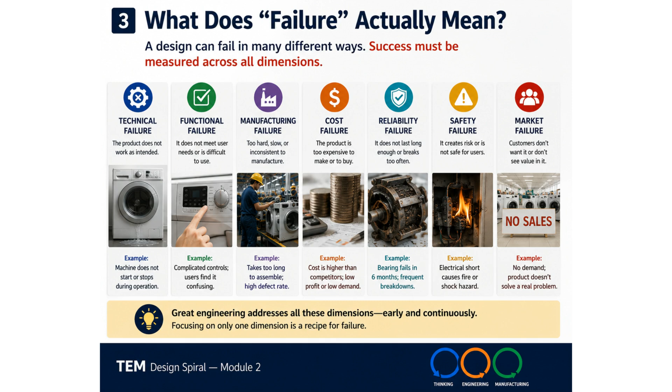A product can also fail because it is unreliable, breaking down frequently during normal operation. Even if everything else is acceptable, a design fails if it creates safety risks for the user. And finally, a technically excellent product can still fail in the market if it doesn't solve a real customer problem, or if people simply don't want to buy it. Successful engineering means balancing all of these dimensions, not just making the product work.

One of the biggest reasons engineering designs fail is surprisingly simple. We solve the wrong problem. Imagine we want to design a washing machine for a rural community. We may assume that customers want more automatic functions, more washing programs, and advanced electronic controls. So we design an excellent, high-technology washing machine. But what if the real needs are completely different?

Perhaps customers need a machine that is affordable, uses less water and electricity, is easy to repair, and can operate reliably under difficult environmental conditions. Our engineering may be excellent, the product may work perfectly, but we have solved the wrong problem. This type of failure usually begins before engineering even starts, when we make assumptions instead of deeply understanding the user and the real operating environment.

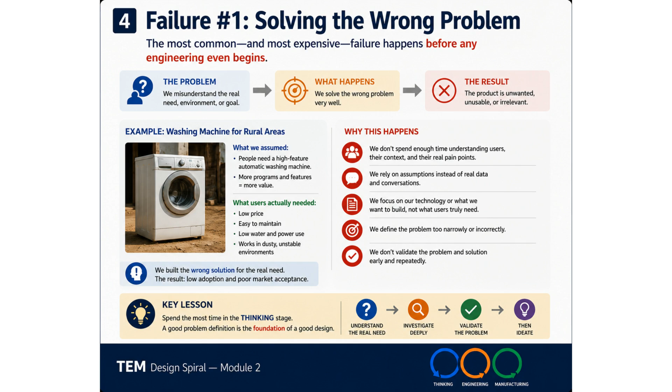That is why the thinking stage of the TEM design spiral is so important. Before asking, how do we design the solution, we must first ask, are we solving the right problem? Once we understand the problem, there is another common mistake. We fall in love with the very first solution that comes to mind.

As engineers, we naturally enjoy solving problems. So when a promising idea appears, we often become excited and immediately start designing. But the first idea is rarely the best idea. Imagine designing a new washing machine. Your first concept may be a fully automatic, feature-rich product. Without exploring other possibilities, you begin detailed design.

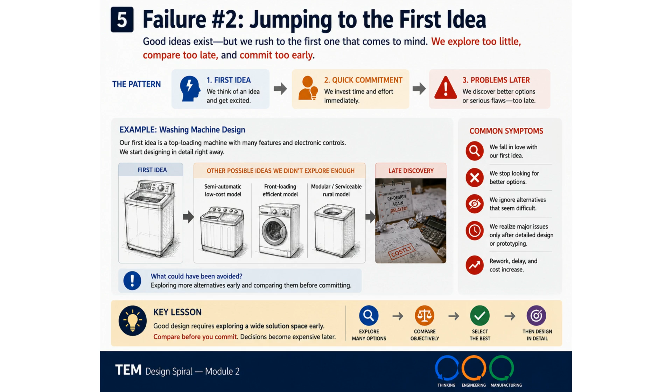Later, you discover that a simpler, lower-cost design would have been easier to manufacture, more reliable, and better suited to the customer's needs. Now the project requires redesign, causing delays, extra cost, and wasted effort. Great designers don't stop at the first idea. They explore many alternatives, compare them objectively, and only then commit to the best solution. In the TEM design spiral, exploring multiple concepts during the thinking stage dramatically reduces expensive changes later in the project.

Another common mistake is starting detailed engineering too early. Once we have a promising concept, we may immediately begin detailed CAD models, engineering calculations, component selection, and technical drawings. But there is an important question. Have we actually proven that the basic concept will work?

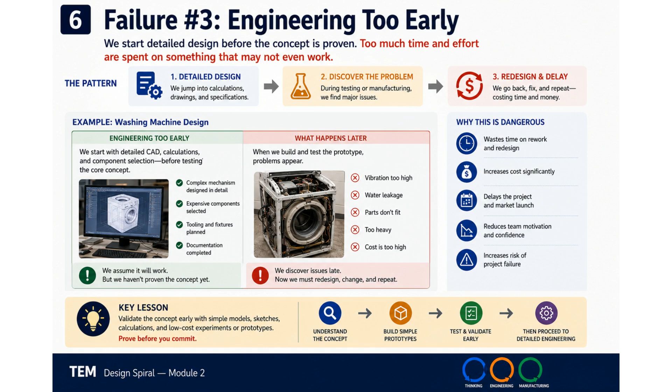Imagine spending weeks designing a washing machine mechanism in detail, only to discover during prototype testing that it creates excessive vibration, requires too much power, or is simply too expensive to manufacture. Now, much of that detailed engineering work must be repeated. A better approach is to validate the important assumptions early. Use simple calculations, simulations, basic models, and low-cost prototypes to answer the critical questions first. Then, once we have confidence in the concept, we can invest in detailed engineering. The lesson is simple. Prove the concept before you commit to the details.

Many engineering designs look excellent on the computer screen. The CAD model is beautiful, the calculations are correct, and every component fits perfectly in the virtual world. But then, the design reaches the factory. The manufacturing engineers immediately identify problems.

Some parts require extremely tight tolerances that are difficult to achieve consistently. Others require expensive tooling or complex assembly procedures. Some components take too long to manufacture, while others are difficult to inspect or repair. The design may still work technically, but it is now too expensive, too slow, or too difficult to produce.

A successful engineering design must be designed not only for performance, but also for manufacturing. This is why experienced companies involve manufacturing engineers from the very beginning of the design process. A good engineer doesn't ask only, will this work? They also ask, can we manufacture it efficiently, repeatedly, and at a competitive cost? That question often determines whether a product succeeds or fails.

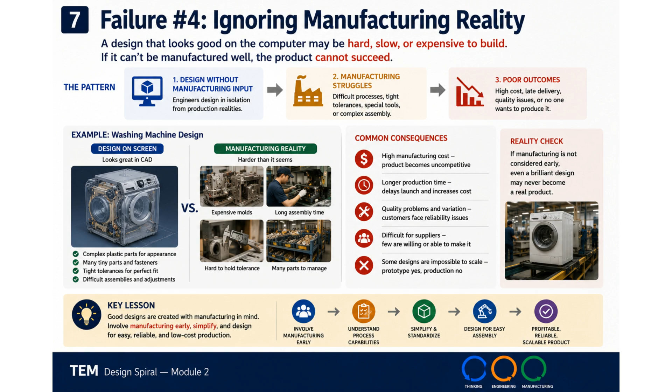All of the failures we have discussed so far lead to one common outcome. We discover important problems too late. Perhaps we skipped concept validation. Perhaps we didn't explore enough alternatives. Perhaps we ignored manufacturing or user feedback. The result is the same. Major problems are discovered only after detailed design, prototype construction, or even after production has begun. At that stage, every design change becomes much more expensive.

A small design modification that would have taken a few hours during the concept stage may now require redesigning drawings, modifying tooling, rebuilding prototypes, repeating tests, and delaying production. The later a problem is discovered, the more people, money, and time are affected. That is why successful engineering teams continuously ask one question throughout the project. What can we test today instead of discovering tomorrow?

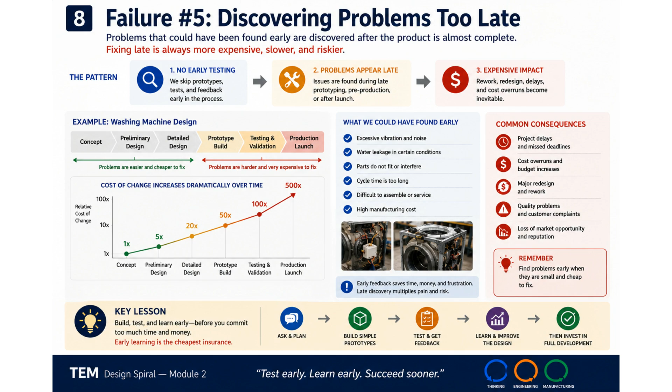The purpose of prototypes and experiments is not to prove that we are right. Their purpose is to discover, as early as possible, where we are wrong. Early learning is the cheapest form of engineering. Why is discovering a problem late so dangerous? Because the cost of changing a design increases dramatically as the project progresses.

During the concept stage, changing an idea may require nothing more than changing a sketch or updating a few calculations. During detailed engineering, the same change may require new CAD models, drawings, calculations, and component selections. After a prototype has been built, the prototype itself may need to be modified or rebuilt.

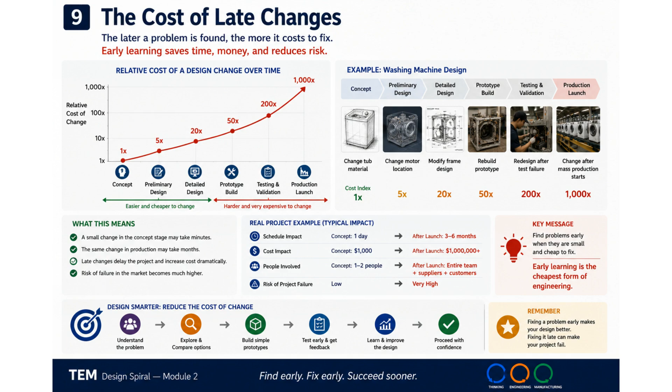And once production has started, a design change may affect tooling, suppliers, inventory, assembly procedures, testing, and even products that have already reached customers. So the exact cost multiplier will vary from project to project, but the principle is clear. The later we discover a problem, the more expensive it becomes to correct. This is why good engineering is not about avoiding all mistakes. It is about discovering mistakes when they are still small, inexpensive, and easy to correct. Find early, fix early, learn early.

So, how do good engineering teams avoid these failures? They do not rely on getting everything right the first time. Instead, they follow a disciplined process that helps them discover what they do not yet know. They begin by understanding the real problem and challenging their own assumptions. They explore multiple solutions before committing to one. They use simple models, calculations, experiments, and prototypes to test the most important assumptions early.

They involve users, manufacturing engineers, suppliers, and other stakeholders before major decisions become difficult to change. And when something fails during testing, they don't simply see it as a setback. They treat it as information. They learn, improve the design, and repeat the process. This is the mindset behind the TEM design spiral. Think early, test early, learn early, then invest in detailed engineering and manufacturing with greater confidence.

The TEM design spiral provides a structured response to the failures we have discussed. Instead of treating design as a straight line from idea to finished product, we move progressively through 3 stages: thinking, engineering, and manufacturing. In the thinking stage, we focus on conceptual design. We understand the real problem, explore different possibilities, and select promising concepts. In the engineering stage, we develop the preliminary design. We analyze, calculate, simulate, prototype, and validate the concept.

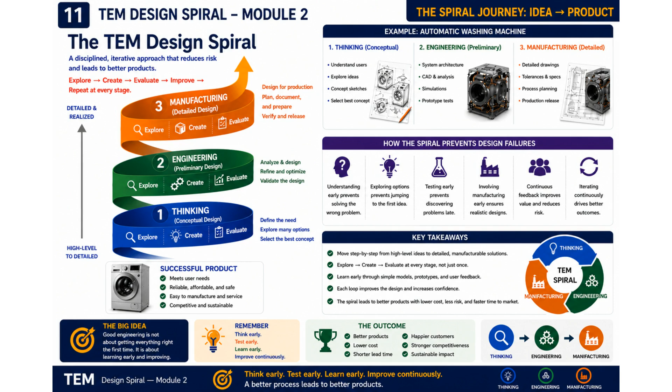In the manufacturing stage, we move toward detailed design and production. We define specifications, tolerances, processes, assembly methods, and everything required to manufacture the product reliably. But the most important idea is this: within every stage, we explore, create, and evaluate. When evaluation reveals a problem, we don't blindly continue forward. We learn, improve, and iterate. So the design moves forward like a spiral, from a high-level understanding toward an increasingly detailed and manufacturable solution. This is how the TEM design spiral helps us discover problems early, reduce risk, and make better engineering decisions.

Let us conclude with the central lesson from this module. Engineering designs do not fail only because of incorrect calculations or technical mistakes. They also fail when we solve the wrong problem, commit to the first idea too quickly, begin detailed engineering before validating the concept, ignore manufacturing realities, or discover important problems too late. The TEM design spiral helps us avoid these failures.

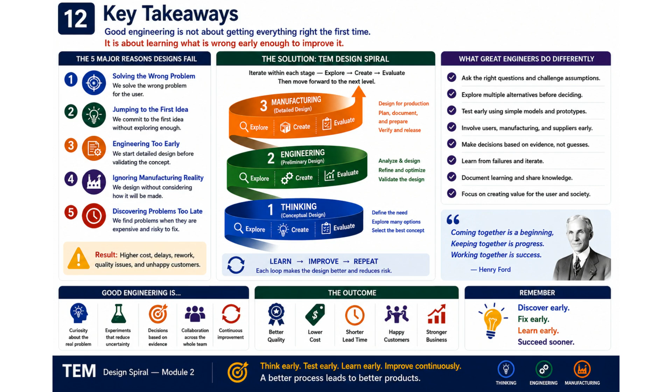At each stage, thinking, engineering, and manufacturing, we explore, create, and evaluate. We learn from the results, improve the design, and repeat the process before moving forward. Good engineering is not about getting everything right the first time. It is about discovering what is wrong early enough to improve it. So remember, think early, test early, learn early, improve continuously. A better design process leads to better products, lower risk, reduced cost, and greater value for the people who use them.